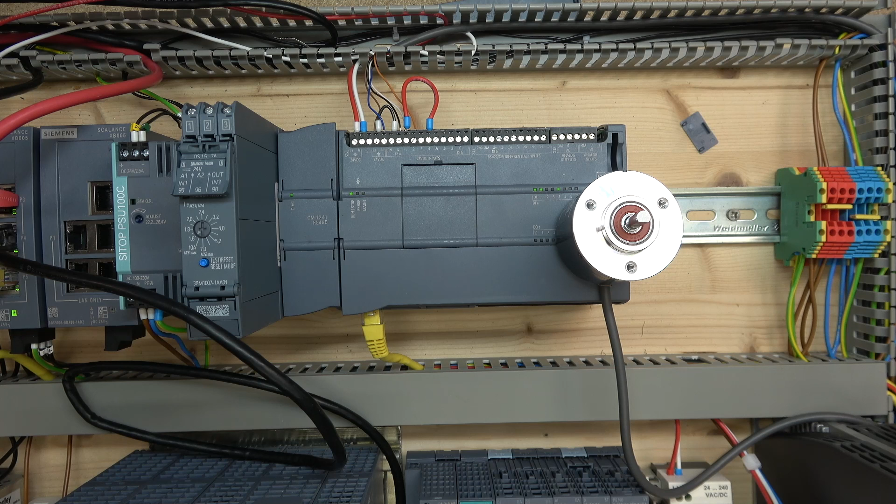So here we are. This is our controller that we have been working on in the last video. This is the wiring. Again, there's going to be a link in the description below if you want to check out how we got to this point. So let's get into the controller itself. First thing we're going to do, click on our controller, and the controller has already been set up.

From there, as you can see in here, in properties, general, you will have all the options that the controller can possibly do. As you can see, I have quite a lot because my controller is a CPU 1217C, which is quite a smart controller, and it comes with a very heavy amount of options. But we're only going to be concentrating today on high-speed counters. If you don't see this high-speed counter for your controller, that just basically means your controller doesn't support any high-speed inputs. So let's get started.

So first we're going to set up the first channel. Remember from the last video, our first channel was A and B count. So we're going to enable it, and once you enable it, we're going to go in here and select what kind of pulses we're going to be working with. As you remember, it's A, B, and we're going to be counting up.

If you go down to addresses, the address for the first high-speed counter is always going to be 1000.0 to 1003.7. That's assigned automatically. There's more stuff in here, guys. Do check it out yourself. There are also things you can set up, but we're going to stick to basics. So our first channel is set up.

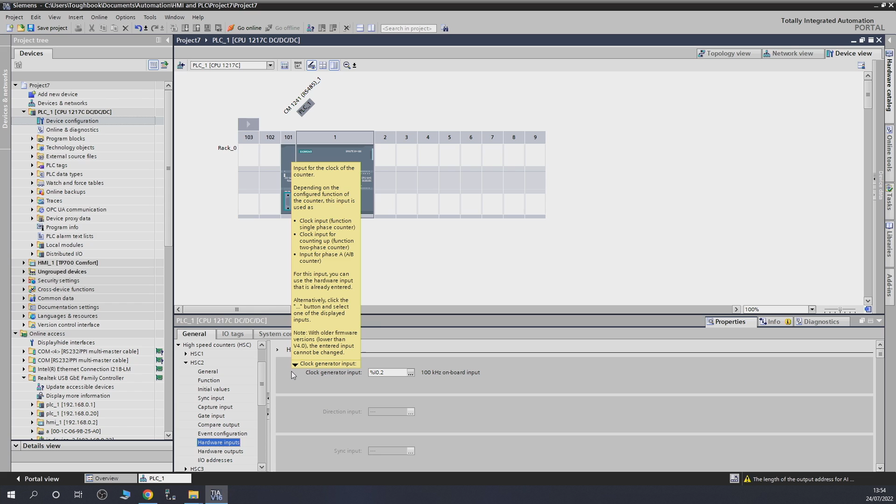Also, if you go in here, I forgot to show that in the previous one. When it says hardware input, it shows you which input is being allocated. As you can see, it only gives me one channel now because that's all I need, because that's how I set it up. So 0.2 is going to be for our Z.

That's done. And a third channel: remember we wanted to check out what will happen if you just use one phase from the encoder. So how about we set this channel up for that purpose? Let's enable that one. Function: it's going to be pretty much the same as channel 2. So single phase, counting up, happy days.

And also down here, you can see the address has been given 1008 because it's the third channel. It's jumping from 1008 to 1011.7. That's it. As you can see, I still have 3 more channels left, so I'm not going to need them, so I haven't done that.

That is good. Another thing we need to do, we need to give higher speed for our input. If you go in our digital inputs now, and go in channel 0 in here, as you can see, by default the standard input filter is at 6.4 milliseconds. If you leave it at that, when your encoder is going to spin, it will not record those counts. It will record some of it, but most of them, I mean 96% of the counts, will be missed because it's not able to process that quick.

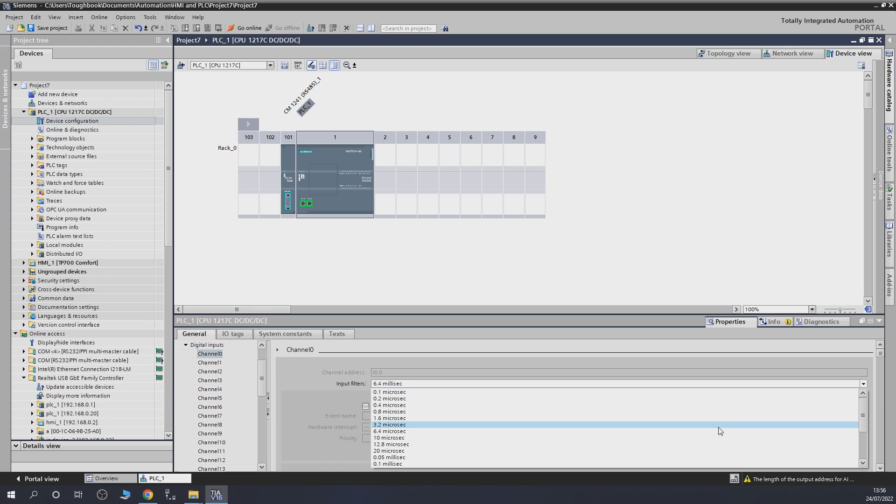How about we fix that? So every single channel you're using for a counter, you need to adjust it to a low amount. In the big Siemens manual, I don't have it open in there, I just literally remembered, there's a range where Siemens recommends what sort of input filter you should use for what hertz of encoder. My encoder is 100 kilohertz, so I remember Siemens recommended for 100 kilohertz to 1 megahertz you should be between 0.1 to 0.8 microsecond.

So what I'm gonna do, I'm gonna be 0.4. You can go 0.1 if you wish to. I'll go 0.4, right in the middle. Same we need to do for channel 2. So let's do that. And then the same needs to be done for the other channel. It was 0, 1, now it's 2, because I keep forgetting that 0 is always our first one, so let's put 4 in here.

And as you remember, let's double check which inputs we need to change, so that was 0.2, and if you go on high speed counter 3, there it is, and we need 0.4. Okay, so let's go in here, inputs, and 1, 2, 3, this one in here, 0.4. And we're going to change that one as well to be able to accept that speed. And with that we have set up our inputs.

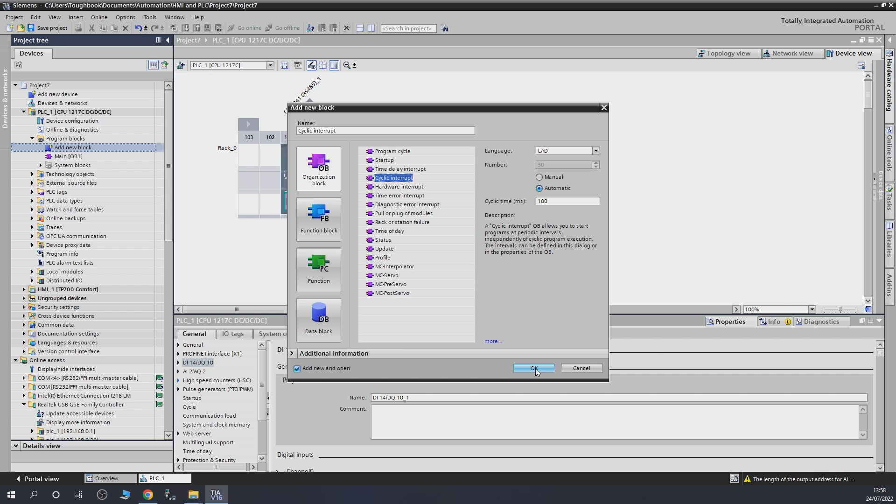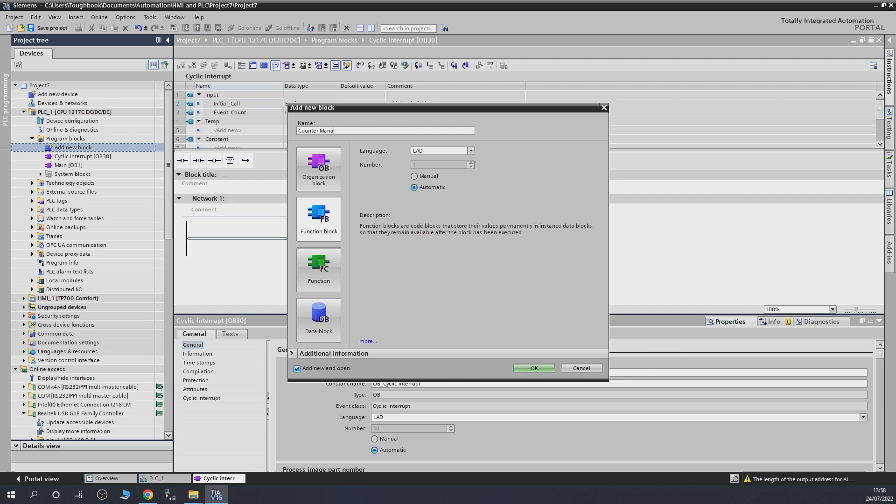Now that we've done that, let's go into our programming block. Siemens recommends this to be called in cyclic, so we're going to do exactly that. We're gonna create blocks to more or less have some form of control over the counter itself. We're gonna leave it cyclic, the OB30, and leave its name like that. And also I'm gonna create a function block, so I can do it all in one block. We're gonna call this counter management. That will do.

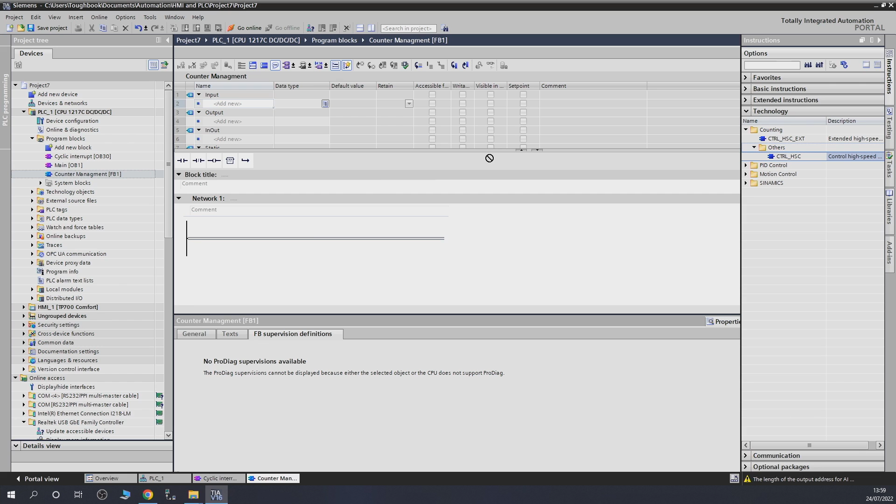From there on, let's go into instructions, collapse the basic, and then go into the technology. As you can see in the technology blocks, we have a couple of options in here on counting. So definitely check out the manual. There's a couple of ways to do it, depending on how you want to control it. I'm gonna go for this block in here because that's the one that gives me more of the options I am after. So again, do check it out yourself so we don't lengthen this video too long.

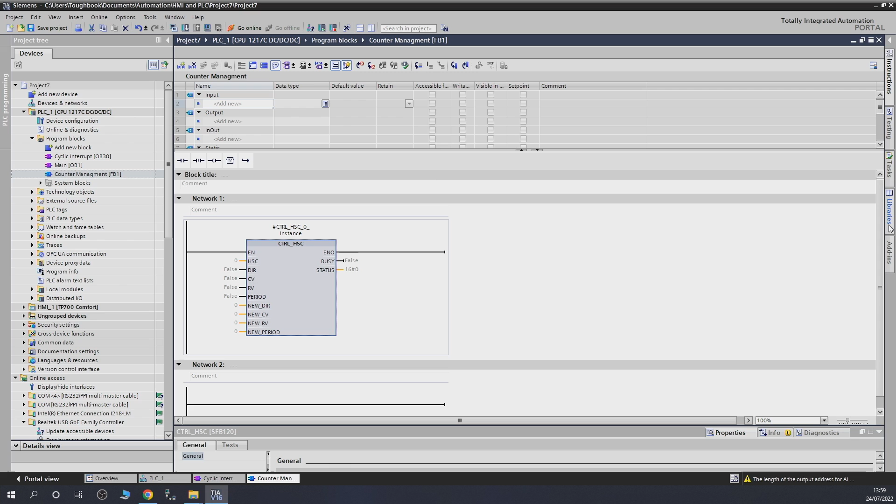Because I'm creating this within the function block, I'm gonna do multiple instances, so my data block stays within this block. So there we go, we've done that. And also I'm gonna open 2 more because we have 3 counters. So let's do it in a network, and multiple instances, so it stays there. And also 1 more in network 3, and we're gonna do multiple instances as well.

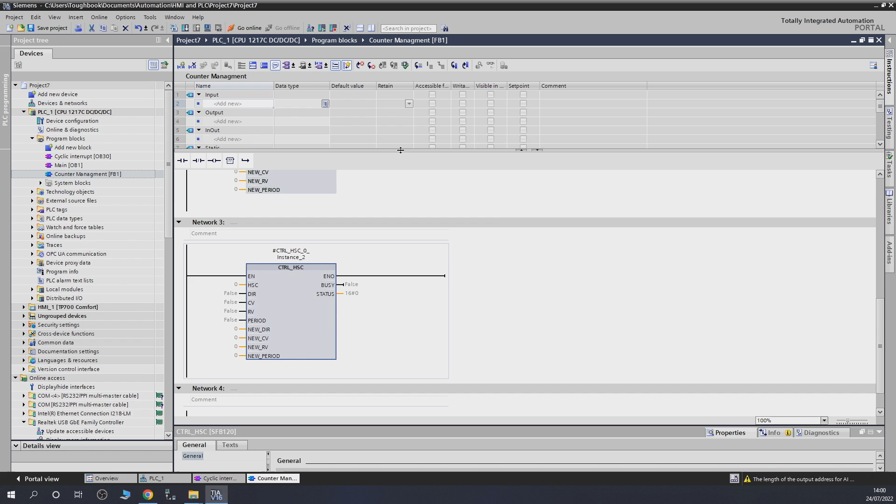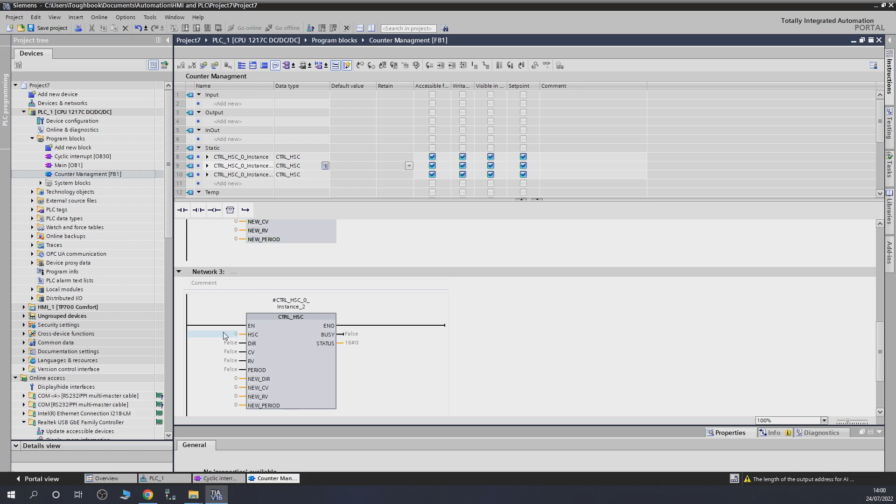The reason I'm doing that is because I want all this to be here. As you can see, all in my static, in the programming block itself, it all stays within here, so I can have full control from here rather than having separate data blocks. Okay, so first thing we need to do, we need to assign each of these instances to which counter it's going to be. By clicking on that, click on the list, all these counters should be on this list in here. So my local counter first, done.

After that, counter 2, done. So now every time we're going to be working on these specific blocks, you'll know which counter it needs to work with. And that one as well, we are going to say counter 3.

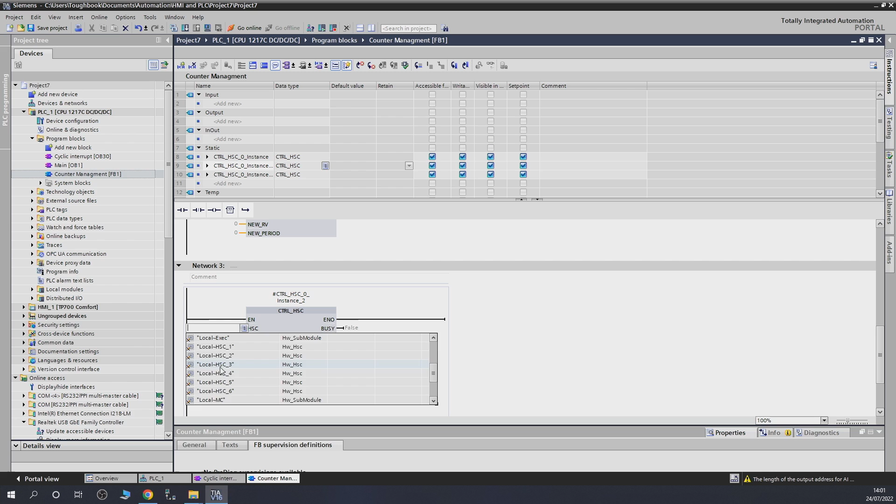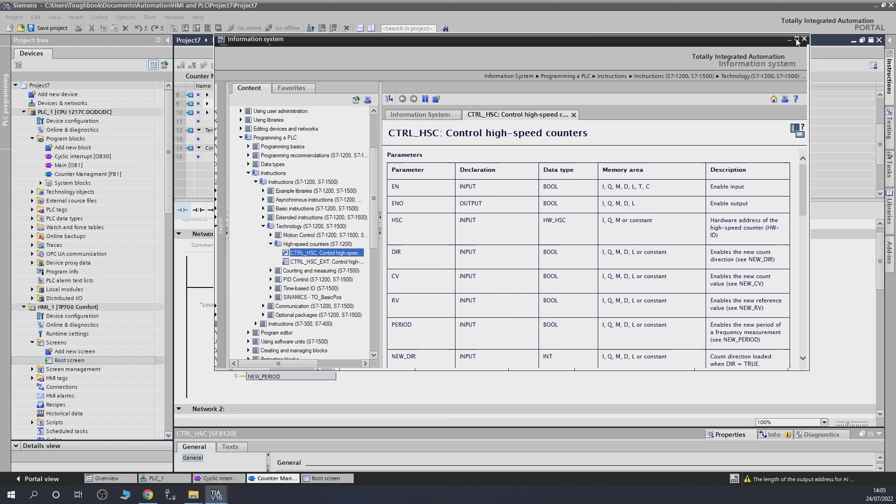Once we've done that, if you click on a block and click F1, it's going to open an explanation of what each input in this block means. As you can see, all the explanations and details are in here, guys. Do read up on it.

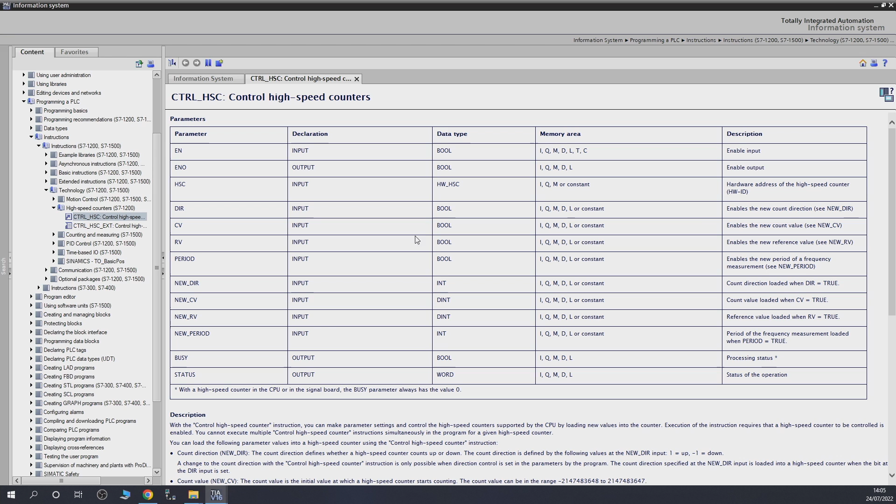The only thing I'm going to be using from this is my CV. It says enables new count value. Basically, every time I activate input CV, it will send in a new CV value, which by default is 0, and that's how we're going to be resetting to 0. Everything else, check it out and read it up if you see fit that you need it. For me, I'm only going to be using that.

From there, I'm only marking this because I'm going to be using it on an HMI. I'll say if my counter 1 is activating a CV, all other ones are receiving the same signal from that first counter. So let's do that, click on that as well, CV. There we go. Having done that, I think I'm happy with everything else in here.

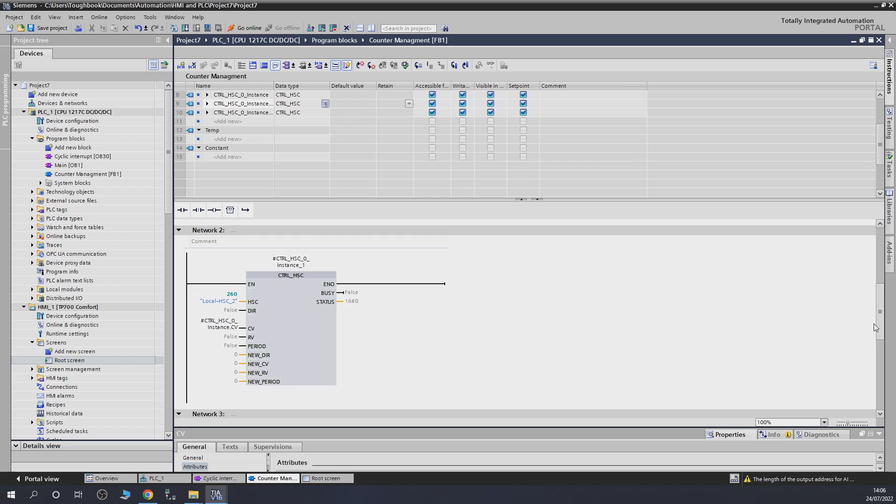So that's pretty much ready to go. As you can see, we didn't do much of it because we're going to be controlling it from HMI. Having done that, all we need to do now is go into cyclic, and we need to call this block in cyclic.

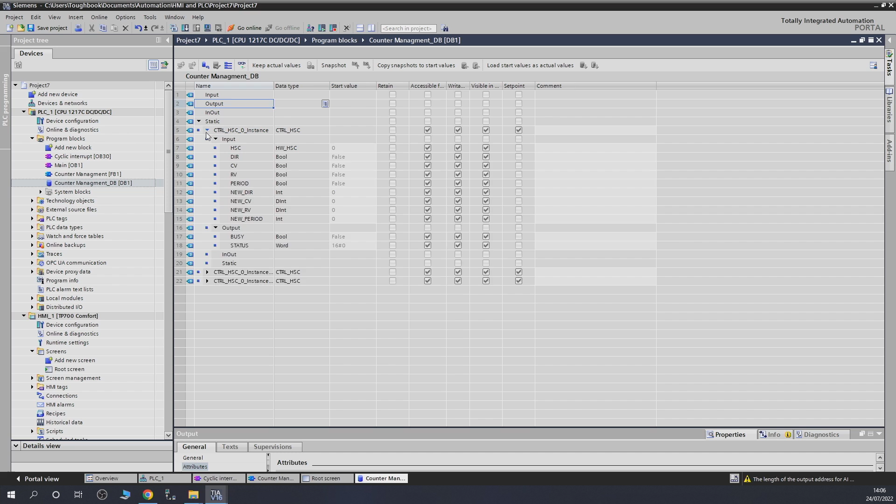Here we go, it's going to create a data block. For our monitoring, if you wish to, all that is going to be sitting in a data block now as well, so we can read all the values and everything we need when we do the monitoring.

Now we've done that, let's create some tags. Let's go into PLC tags and go into default. I'll call this counter 1. Counter 2, we'll call this counter 3. Okay, so we're going to change the address to dint. Remember the addresses that we had?

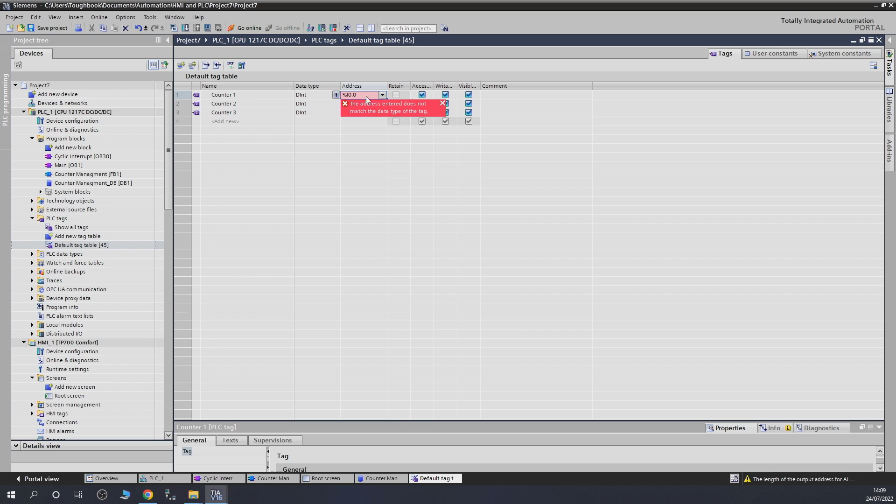Should have done that change at the beginning, but it doesn't matter, so we didn't. Now we have to do everything manually. From there, what we need to do is remember our addresses from here. So where are we? We can go in here.

Come on, in here, remember addresses. It's going to be ID, channel 1, hardware address. As you can see, 1000 is the first one. So that's all we need to do.

Let's go back to our tag table. Usually I would create a separate tag table for things like that, but it will do for now. So we're going to call it ID 1000, so the value can be stored here and we can read it.

So the next one, remember, it was ID 1004, and let's not forget the D. And the next one, it was ID 1008. And here we go, now we've got our values.

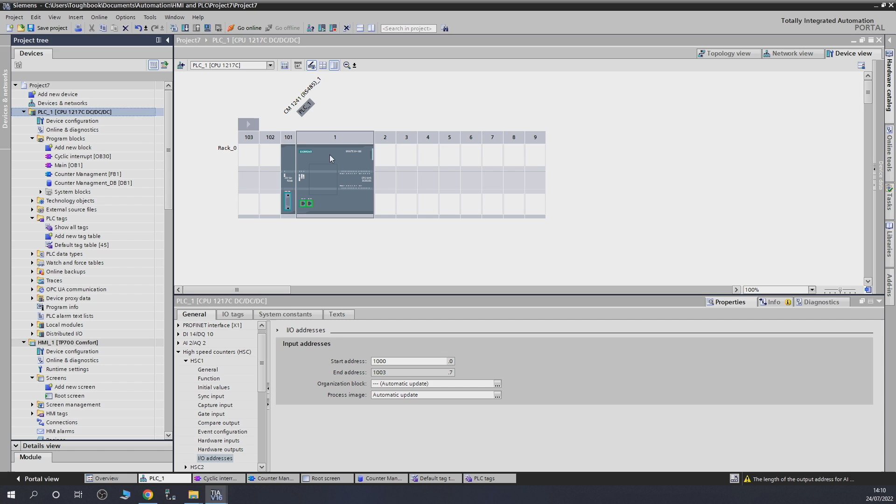So if we load this in now, let's go in here, concentrate on the CPU and get this into our controller. That's done, so finish it up. Let's start up the controller, and let's go online.

Actually, I'll tell you one thing, we're not going to go live from here. We're going to go into our tags, show tags in here, and we're going to go live from here.

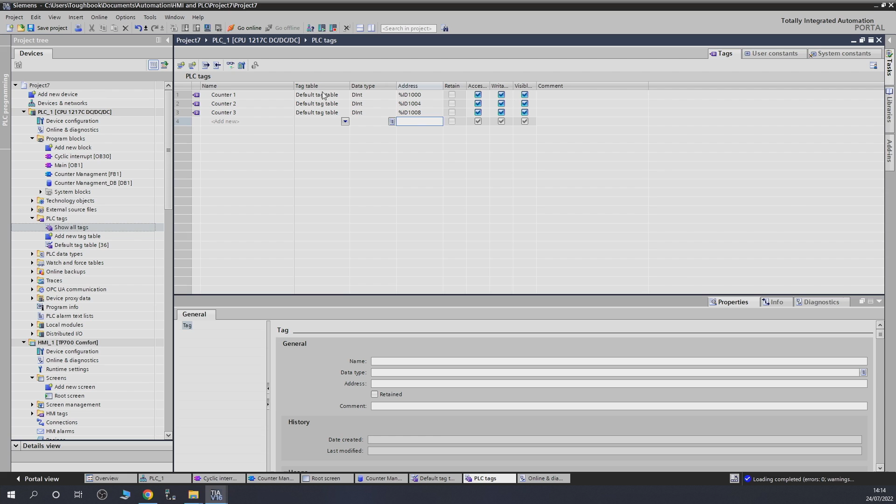And if we've done everything correctly, we should be able to see the values as we move our encoder. As we move our encoder, values should be going up. As you can see, everything's working perfectly well.

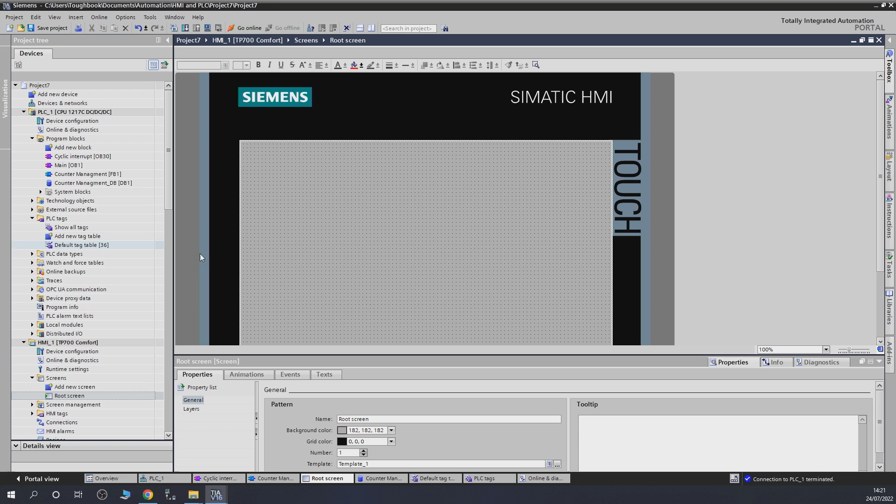So how about we do everything now on HMI? Alright, there's our HMI, so let's go into the screen so we can read the value. That looks about good, so let's do a bit of prettying up. Let's set the text size, we're going to leave it at 48, that'll do.

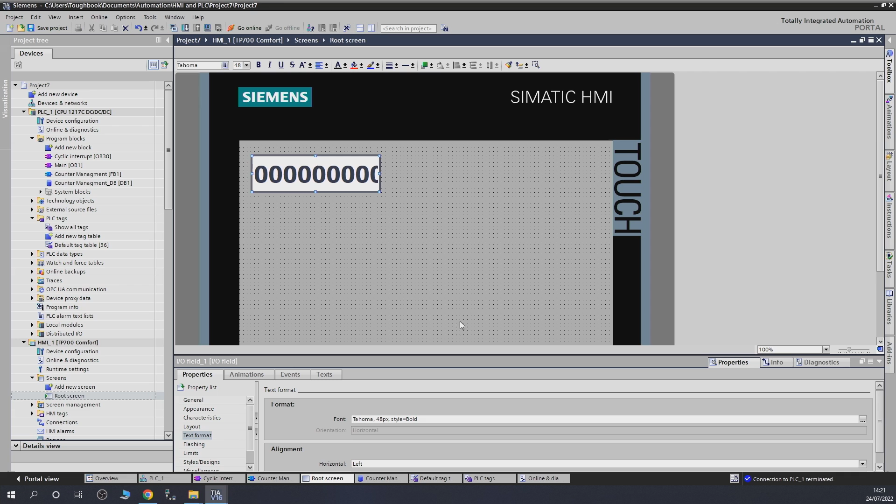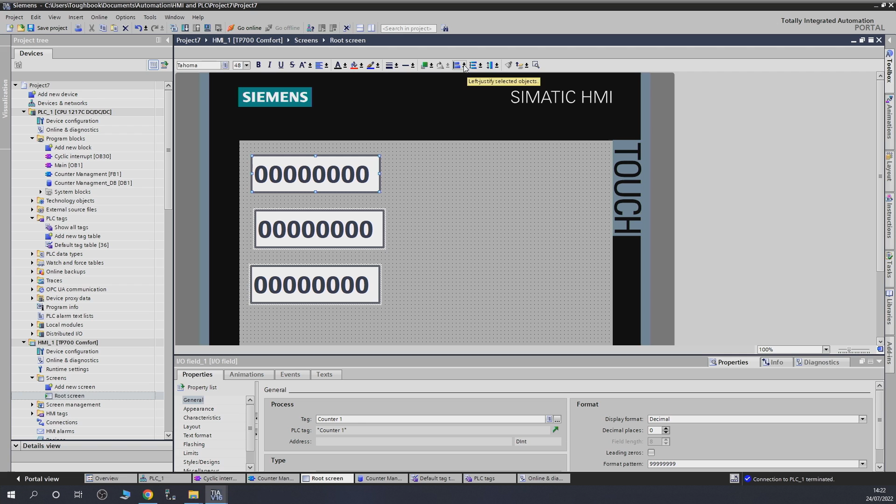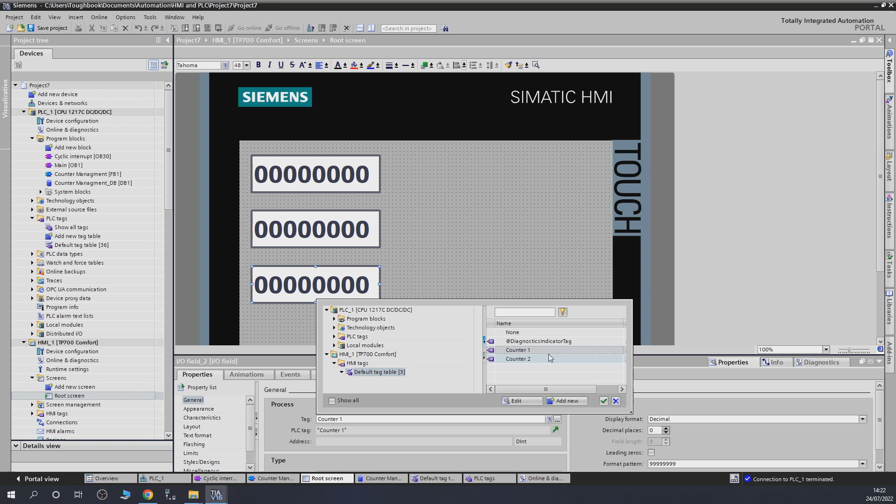So spread them out a little bit, somewhere down here and somewhere down here. Let's get all this into a perfect line, there we go, and that looks pretty equal. So let's give this a counter 2, and we're gonna give this one a counter 3. Alright, so there we go, we got that.

So next, let's name them. Let's grab our text, click it in here, and give it exactly the same text format as we gave the zeros, 48. We're going to copy and paste that, so that's 3 copies. That one can go here, that one can go here, and that one can go here.

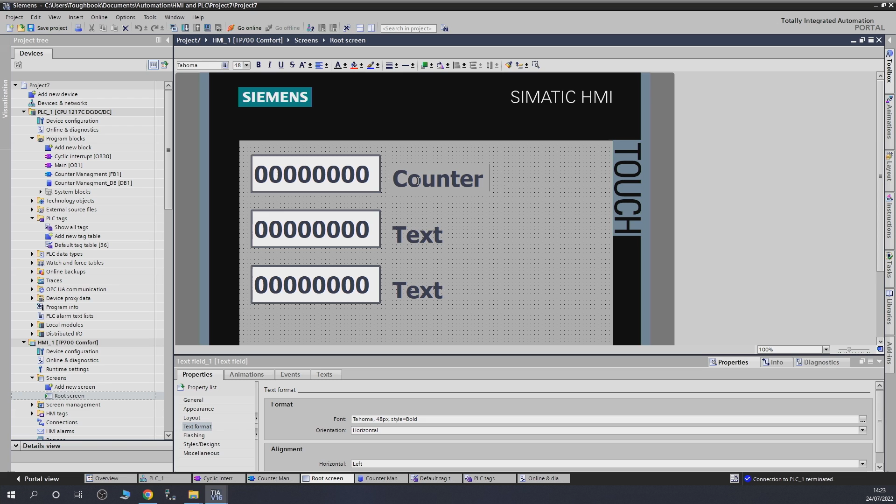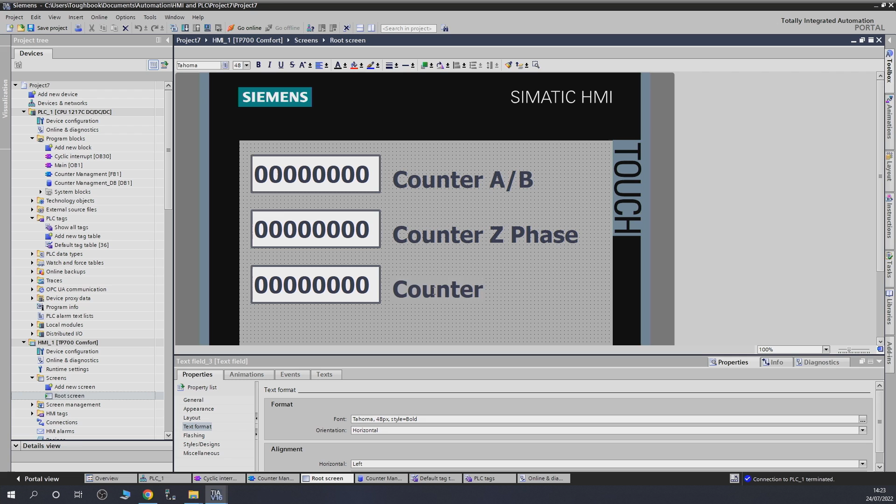So we're gonna call this counter A slash B. We're gonna call this one counter Z phase. And we're gonna call this one counter single phase. Okay, that's a little bit bigger than we want.

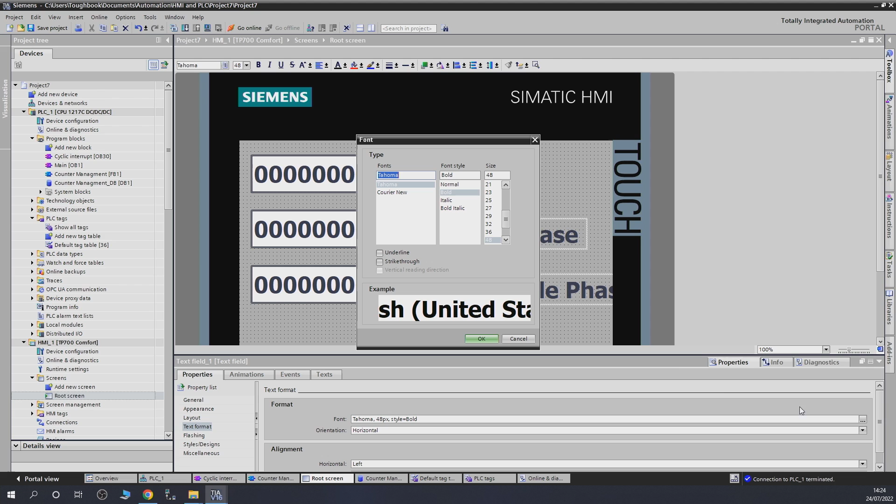So how about we do that in one go? I don't really know, so I want to highlight. Here we go, can I? Yes, I should be able to change the text format. Let's change it to 36. How about that, that looks good, that should be more or less fine.

So the next thing, literally we're not here to make things pretty. So another thing we want to do is put a button on it. Let's put a button on it, and let's make it a little bit bigger. Align it with this one. We're gonna call it a reset, basically let's go counter reset. There we go, so let's click that and let's make it fit.

Let's put the capital C and let's give it an address. We're going to take the address straight from the block itself. So we go in here, we go into the events, and we're gonna call it set bit while key pressed. That's happy with that, and let's click that one and look for the address.

For that, we're gonna go straight into the block itself, and then into counter management. In there, select our first counter, remember that's the boolean in here, that's CV. Remember I told you that's a boolean we need to activate, so the other one's going to reset at the same time, giving the value 0. So there we go, we have done that.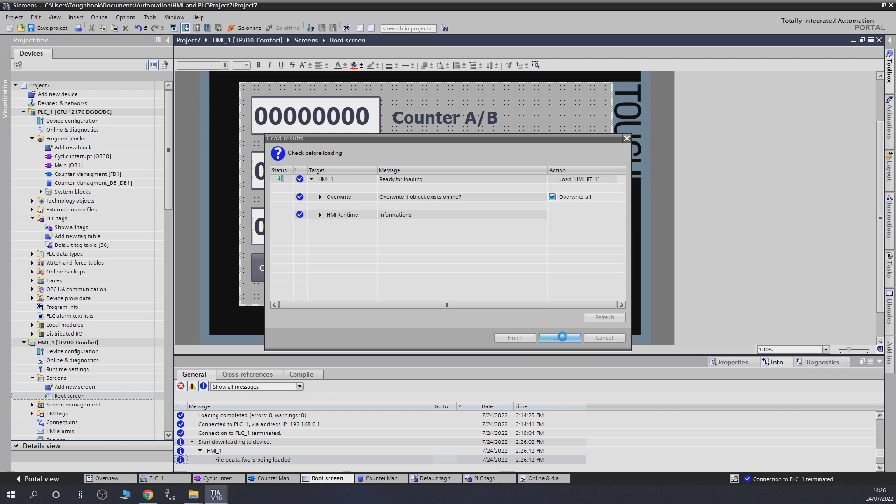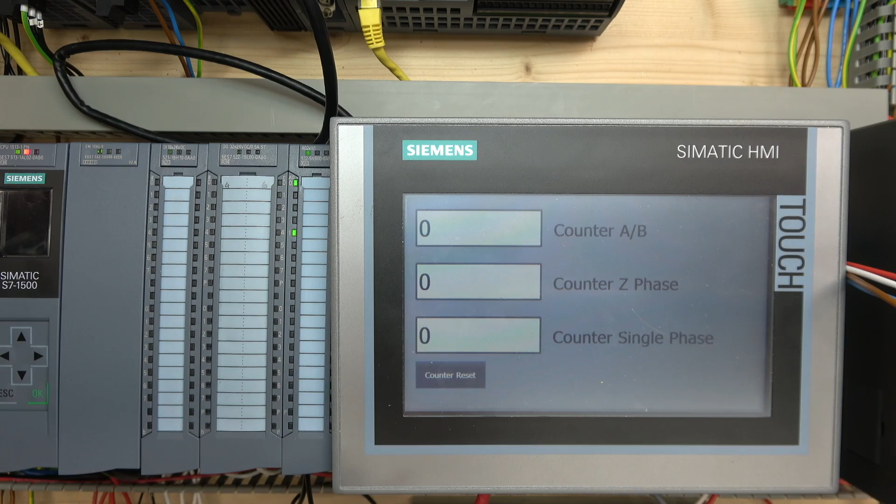And here we go, so let's check out how that looks. There we are, so here is our encoder. Start spinning, and here you go, all the values are spinning, and that's how I got the values on the screen. As you can see, this button here, by clicking on it, will reset all our values. And that, ladies and gentlemen, hopefully gives you an understanding of how to interact with values, how the counter is set up, and how I got that onto my HMI.

And from there on, guys, the world is full of opportunities and possibilities for you to explore and play and create some complex applications.